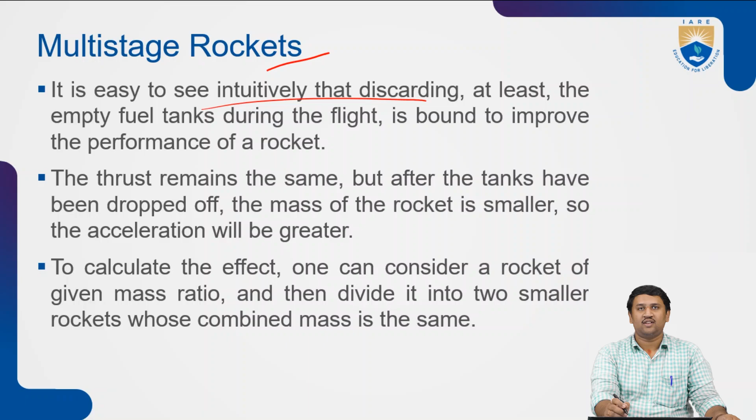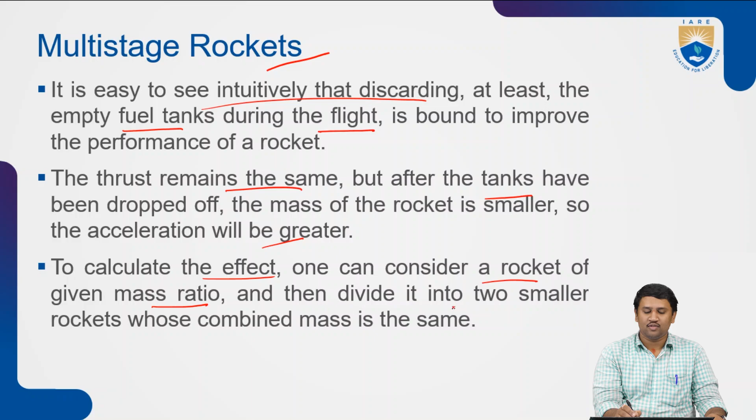It is easy to intuitively see that discarding the empty fuel tanks during flight improves the performance of the rocket. The thrust remains the same, but after the tanks are dropped off, the mass of the rocket is smaller and the acceleration gets greater. In order to calculate the effect, one can consider a single rocket of given mass ratio, then divide it into two smaller rockets whose combined mass is the same. This we have already discussed in the previous class.

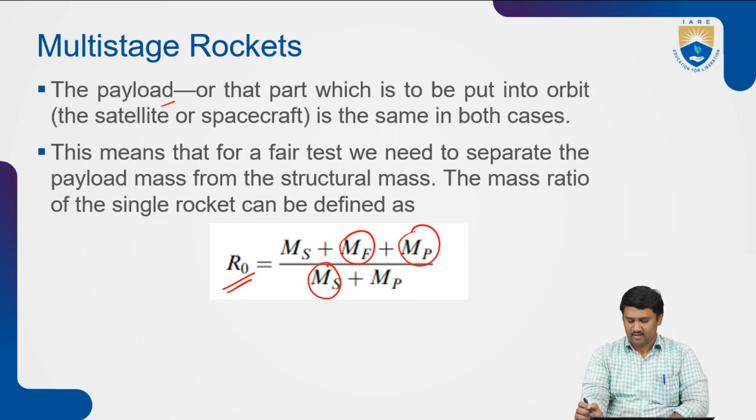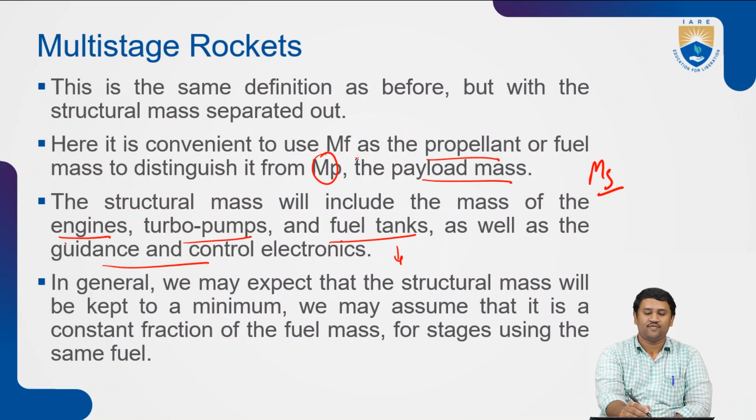In order to keep this empty structural mass to a minimum, we may assume that a constant fraction of your fuel has to be maintained by your structural mass. Now let us understand the same.

If you are considering a single stage rocket, it will be in this manner, where you have mass of the payload, mass of fuel, and everything else related to your mass of structures. If you split the same thing into two sections, the mass of fuel gets halved, similarly the structure also gets halved, but your payload remains the same.

Now after a certain duration, what happens? If we consider this as stage 1 and stage 2, and this is your payload, after a certain duration of burning of stage 1, that becomes empty weight. That can be discarded so that your complete structural mass gets halved. So half will be removed, whereas the other half of the structural mass from your initial stage and total weight remains as it is, along with half of your fuel.

This can be completely given, in terms of mass ratio for the first stage of the rocket, as mass of structure, fuel as well as payload, which is my initial mass, over mass of structure, half of the fuel and half of the complete this one. This will be instantaneous, or M naught by M, as defined in your mass ratio.

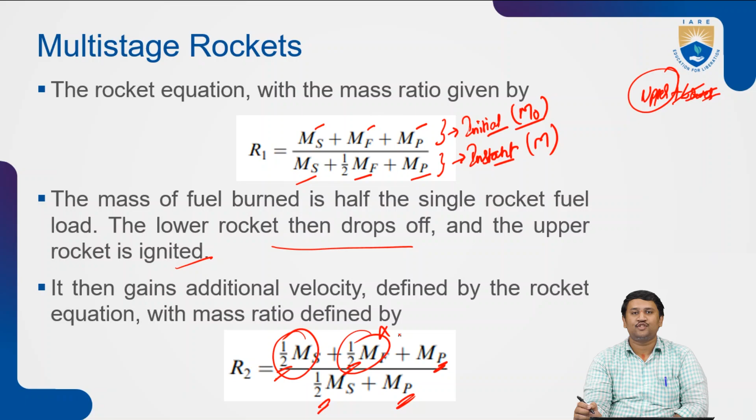Next, MP is nothing but your payload weight, and MS is the remaining final instantaneous structural weight as well as the payload weight, because at the end you will be consuming all of the fuel. Now, if you consider these same ratios and put them into your simple rocket equation, what happens for a rocket having a single stage? You get this equation, where rocket vehicle velocity is nothing but exhaust velocity times the logarithm of your initial rocket mass ratio.

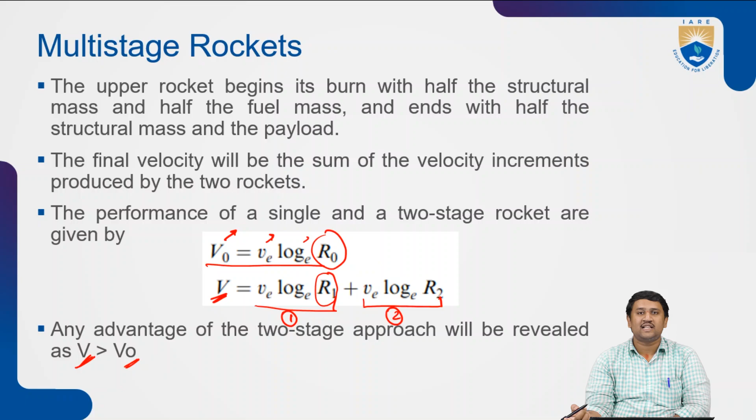Whereas if you're going for multiple stages, particularly a two-stage rocket engine, what happens? The rocket velocity will be equal to a logarithmic value of the first mass ratio for stage 1, plus another addition for stage 2. On comparing, we can get a clear idea that the final rocket velocity for multi-stage rockets is more than for a single stage rocket, and based on this we will be optimizing it further.

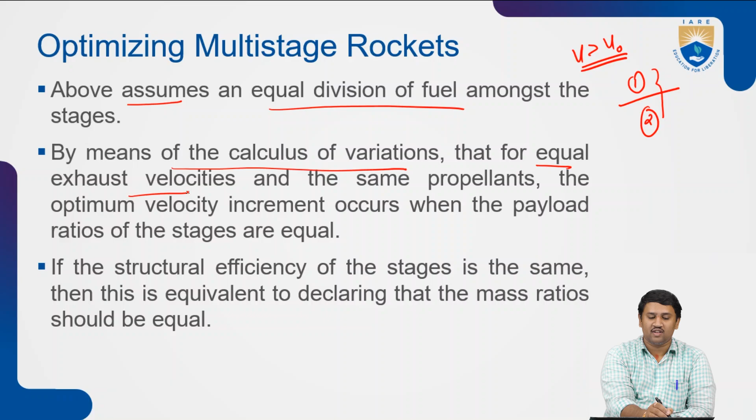Previously, based on v being greater than v naught, we assumed equal division of fuel among the stages. Let's say for stage 1 and stage 2 we have equal divisions, but by calculus of variations, for equal exhaust velocities and the same propellants, the optimum velocity increment occurs when payload ratios are equal across stages. And if the structural efficiency of the stages is the same, this is equivalent to declaring that the mass ratios should be equal. We will understand this clearly before going further.

By means, what we were assuming earlier was for stage 1, stage 2, as well as payload - it's the same example we considered earlier. The mass ratios, particularly the mass of fuel in stage 1, equals the mass of fuel at stage 2. If payload doesn't have any fuel, we are not considering that.

By means of some variations, particularly using calculus, calculating for equal exhaust velocities VE1 and VE2 with the same propellant, the optimum velocity increment occurs when the payload ratios for the stages, denoted by L, are equal. Similarly, if the structural efficiency denoted by sigma of the stages are the same - these are the two new terms we will discuss further - the payload ratio as well as the structural coefficient being same for each stage is equivalent to declaring that the mass ratios are the same.

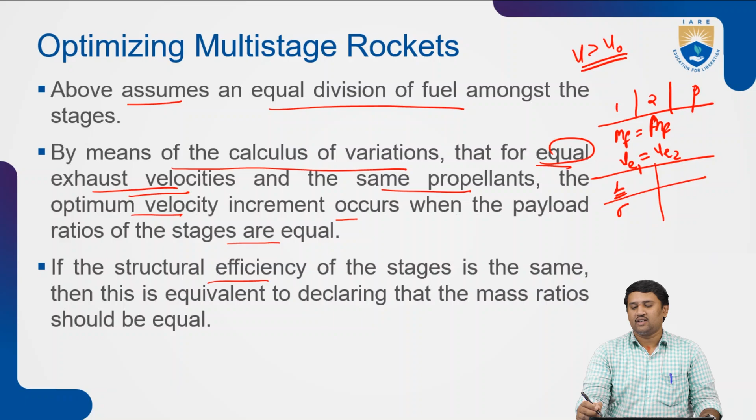Now let us understand the payload ratio. It means the measure of usefulness of the rocket, and the structural efficiency is a measure of degree of optimization of engineering design, denoted by L and sigma for each stage. For optimum performance, the mass ratio will also be the same for each stage.

Now, for example, in a multi-stage rocket, what happens? We'll just go back. Let us see the two-stage rocket engine in a combined form. In a multi-stage rocket engine, if we consider simply what you are doing for a single stage, you are dividing it into two - stage 1 and stage 2.

This is the final payload that we are supposed to inject into the orbit. Considering this as the complete payload, what happens? For stage 1, it's the complete payload that is supposed to be injected to a certain altitude by whatever fuel it has, as well as the structural mass - it's supposed to consider the structural mass as well as the mass of the fuel.

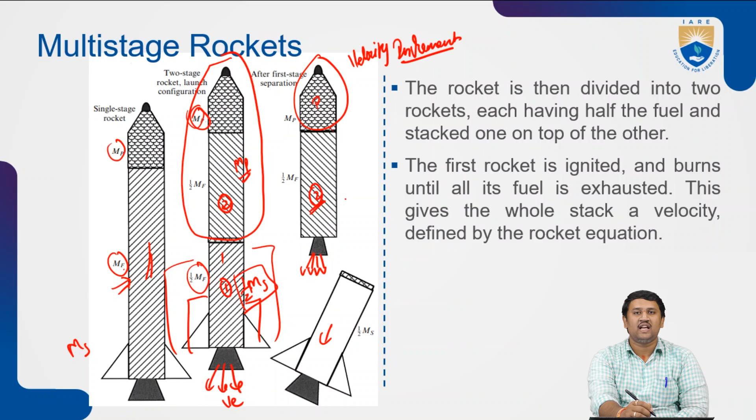In order to drop this particular payload into a certain orbit or altitude, the energy required will be less compared to stage 1. Because at stage 1, the complete stage 2 as well as the stage payload is a complete payload for stage 1, whereas for stage 2, only the final payload is the actual payload to be inserted into orbit. For this purpose, stage 2 does not need that high amount of thrust and high specific impulse. Let us come back.

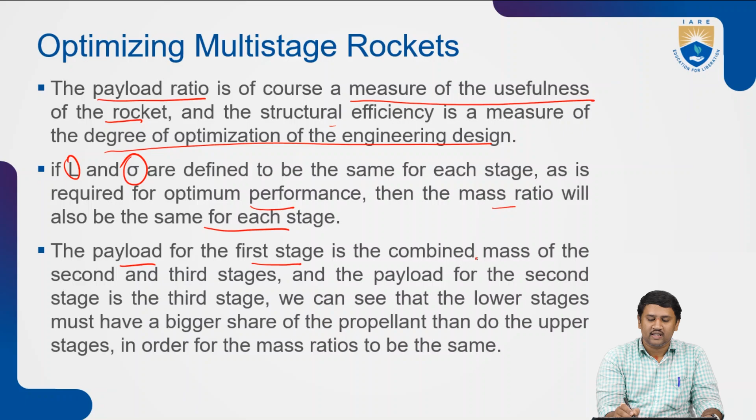Now, as discussed, the payload for the first stage is a combined mass of the second and third stages. In our case, the third stage is my payload, particularly a satellite or a launch vehicle, anything else. And the payload for the second stage is only the third stage, which is nothing but our payload.

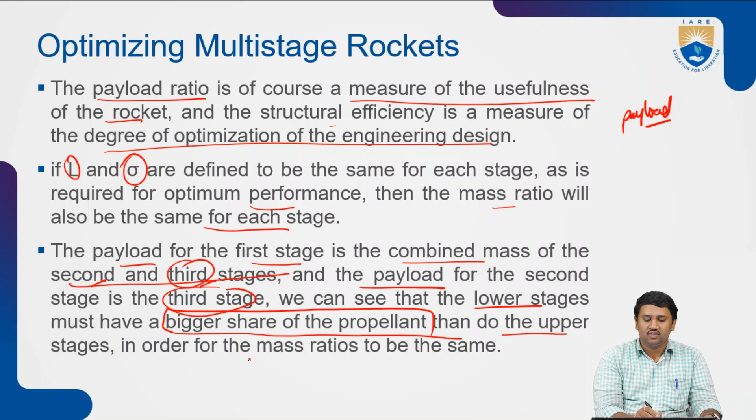Now, the lower stages should have a bigger share of propellant. Why? Because we need to create more exhaust velocity, particularly more velocity, in order to push the second and third stage further. So my lower stages should have more propellant to create more velocity than the upper stages, and in order to keep the mass ratios and exhaust velocities consistent. Now, if we denote this mathematically...

The payload ratio for a single stage is denoted by L, which is the mass of payload to the ratio of mass of structure and mass of fuel, and this is for a single stage. Similarly, for structural efficiency: mass of structure, mass of fuel, and mass of structure again.

Let us understand. In this case, everywhere, mass of payload is nothing but final to initial, particularly in order to inject the payload to a final orbit, what are the initial structural as well as fuel requirements that we require. Based on that, we are providing the payload ratio. Similarly, for structural efficiency, what will be the final structure that is available after the complete exhaustion of fuel, compared to the initial. The structural efficiency is also called as coefficient.

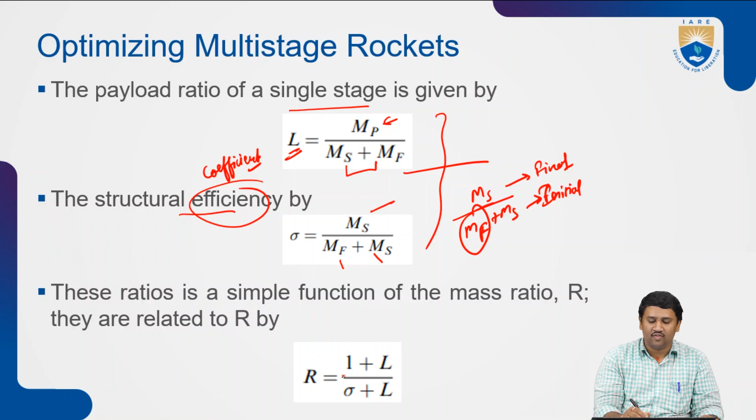Now, if we are considering these ratios as a simple function of mass ratio, then R can be rewritten as 1 plus L, divided by sigma plus L.

Now it's convenient to represent the mass fractions for all three stages as A, B, and C respectively. So the mass ratio for the first two stages R is defined by A plus B plus C, over B plus C, and B plus C over C equals to R.

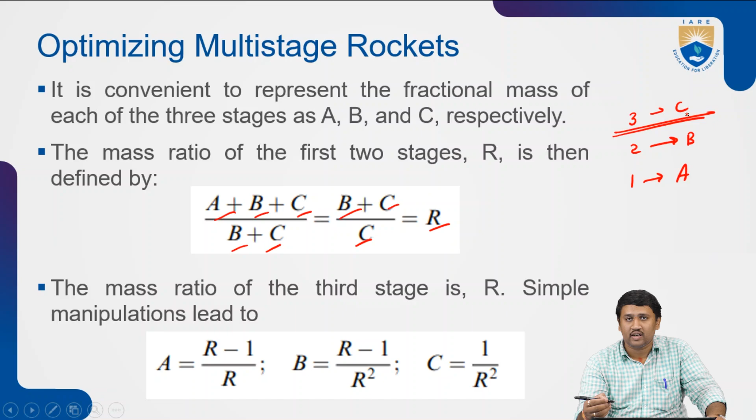Let us understand this: my stage 1, 2, 3 — or let's consider it vice versa, it will be better. My stage 1 is A, stage 2 is B, stage 3 is C. Now this third stage, as we considered previously, is my payload, or you can consider another third stage, it's not an issue.

Now, for the first stage, as discussed earlier, stage 2 and stage 3 are a combined payload. For that reason, we are considering fractional masses, the initial mass, given as m-naught by m. Initially, for stage 1, the total mass of the rocket is basically A plus B plus C, to the ratio of the final mass of the rocket upon completing the first stage, which is B plus C in the denominator.

In a similar form, if we consider the second stage, what happens? This will be the only payload. And while considering the initial mass of the rocket, it will be B plus C as the numerator, to the ratio of the final mass available at the end, which is C. Now we consider these as proportional, equal to my stage ratio R.

Now the mass ratios for the third stage: in order to determine the mass ratios for the third stage, we can rewrite the same in terms of proportions A, B as well as C, and find the basic proportions in which A, B and C are to be maintained in order to create a 3-stage rocket engine.

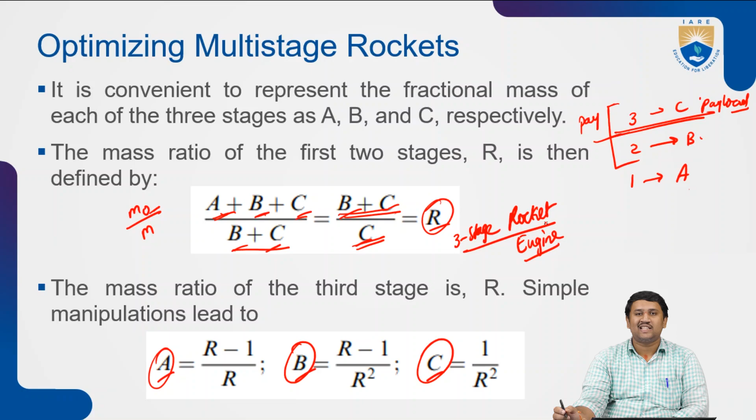Now, for a fair test, the optimization of the value should be determined from parameters of the original single stage rocket. If you consider a single stage rocket, we are making a small comparison to understand how we will be able to identify the parameters. Now, the assumed parameter of a single stage rocket for the same limit is 4.67, which is nothing but my mass ratio R for a single rocket.

Whenever we are considering a 3-stage rocket, considering the first stage towards the ground, second as well as third, the major proportion is to be borne by the first stage. Let's call these stages A, B, C. It's approximately 78.4% for the first stage, similarly B will be 16.9% and C 4.6%. These are the mass ratios identified by considering a few parameters.

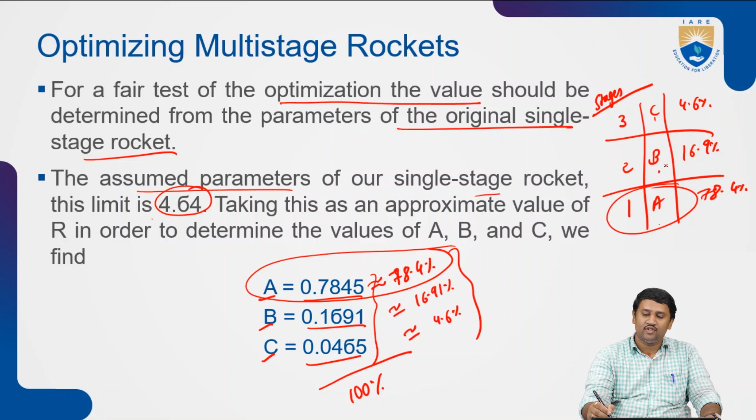This holds because whenever we are launching a 3-stage rocket, we are considering B and C as a payload for stage 1, and for stage B, only C will be having a smaller payload weight. If you are solving more accurately, this leads to a value of 3.39 as the mass ratio for the stages, maintained for each and every stage.

Each stage now has the same mass ratio, so the velocity increment is also gained by the same amount. The total velocity gained by each and every stage is 3 times 2700, which is the exhaust velocity, considering it the same exhaust velocity, multiplied by the natural logarithm of 3.39 as the mass ratio.

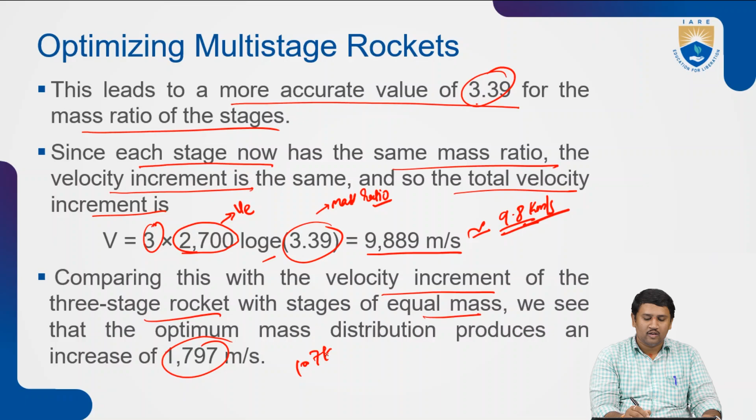This gives around 9.8 kilometer per second. The total velocity of the three-stage rocket engine would be 9.8 kilometer per second. Comparing the velocity increment for three-stage rocket engines with stages of equal mass, we see that optimum mass distribution produces an increase of 1.7 kilometer per second in addition.

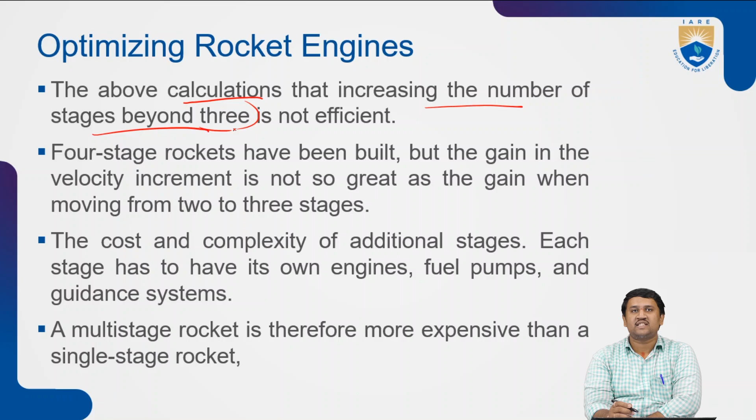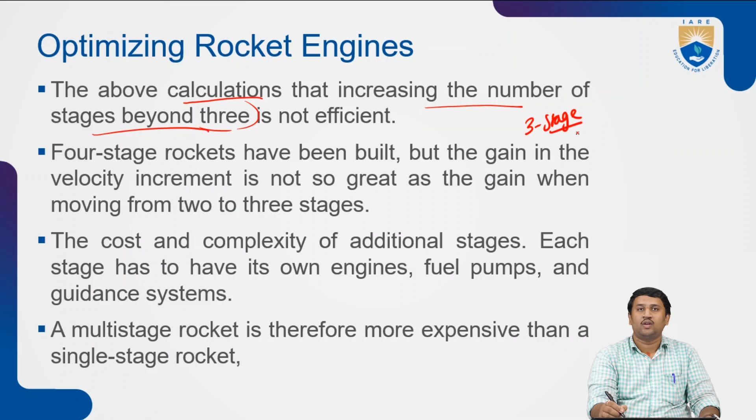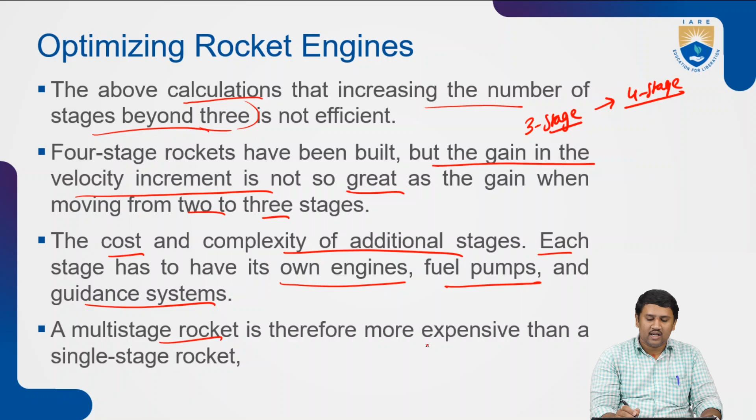Now, as we have optimized the multi-stage rockets, we are supposed to optimize the rocket engines also. The calculations we performed earlier increased the number of stages till 3. What if we increase the stages to a 4-stage rocket? The issue is the gain in velocity increment is not as much compared to going from 2 to 3 stages, and the cost and complexity of each additional stage increases, where each stage will have its own engines, own fuel pumps and own guidance systems to operate. A multi-stage rocket is therefore more expensive than a single stage rocket, obviously.

Now, whenever we are optimizing the rocket engines, let us understand in what way a rocket travels. A rocket which is currently under lower atmosphere operates in conditions very different to those in the vacuum of space. If you consider the same type of rocket engine, those efficient under Earth conditions are completely different in space. So these are supposed to work under two separate regimes in which the conditions vary drastically.

At the initial stages of flight, the atmospheric pressure is high near the Earth, and it affects the performance of the rocket, whereas atmospheric drag and other aerodynamic effects are also strong in the low atmosphere. In space, the engines operate in vacuum and there is no drag or lift. The rocket exhaust is strongly affected by the pressure at the exit of the nozzle, and the air pressure retards the exhaust stream. For example, let us consider a rocket nozzle.

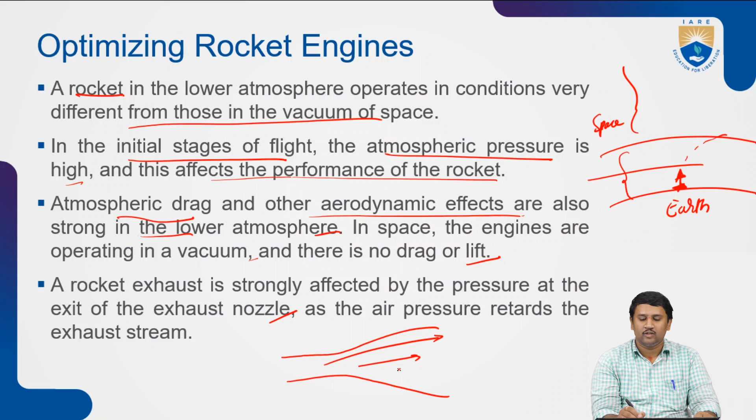This will be my nozzle. Whenever the exhaust is sent through, particularly exhaust velocity, gases in terms of combustion products are sent toward the nozzle. What happens at the lower atmosphere versus space? We have air, particularly air at atmospheric pressure, which varies according to altitude, which directly affects the performance of the rocket engine. Under rocket principle, whatever exhaust gases are getting out, the same amount of momentum or opposite force we are getting from the rocket engine. In space, there are no atmospheric effects to be considered.

As soon as the rocket gas expands, the surrounding air will try to push in. If the pressure of the exhaust is less than the pressure of the atmosphere, the air tends to push the exhaust gases towards the center of the nozzle, whereas if the pressure of exhaust is higher than the pressure of atmosphere, what happens?

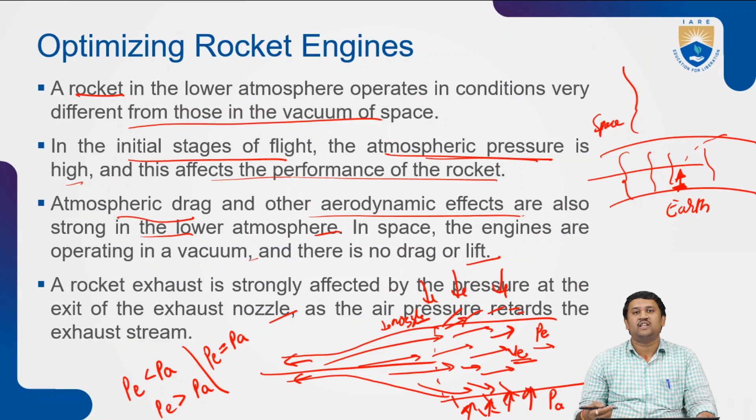The exhaust will try to develop itself along a certain area through which it can dissipate its energy. In some cases, the pressure of the exhaust equals the pressure of the atmosphere. In those cases, it follows a certain boundary in which the energy is dissipated. These particular conditions are called nozzle expansion, which we'll discuss further in module 2.

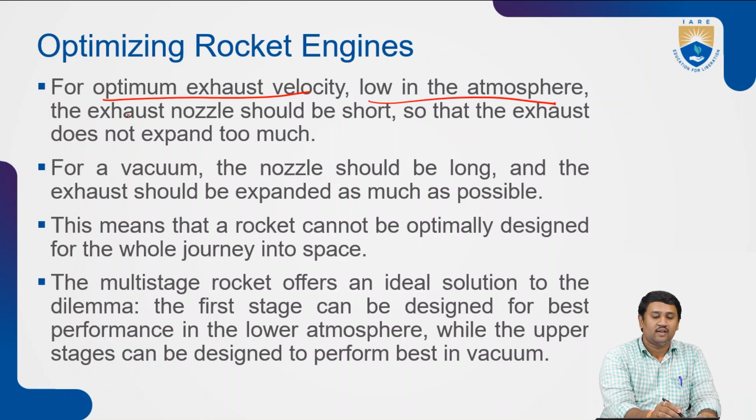In order to find the optimum exhaust velocity in the atmosphere, the exhaust nozzle should be short and the exhaust should not expand too much. For vacuum, the nozzle should be long and the exhaust should be expanded as much as possible.

This means a rocket cannot be optimally designed for the whole journey through space, whereas a multi-stage rocket offers an ideal solution to this dilemma. The first stage can be designed for best performance in the lower atmosphere, whereas the upper stages can be designed to perform best in vacuum.

This applies to the nozzle length and it can also apply to the type of fuel used. Do you understand this?

Let's consider the same example: a 3-stage rocket engine where the third stage is my payload. Let's say the first stage will be working, and if it's a single rocket engine, I'm supposed to have a single long rocket which burns continuously to deliver my payload to a certain altitude.

Now, in my case, if I'm considering a multi-stage rocket engine, I can split it into two, right? I redesign my first stage to overcome aerodynamic properties, particularly atmospheric properties. To counter them, I need a higher amount of propellant in the first stage.

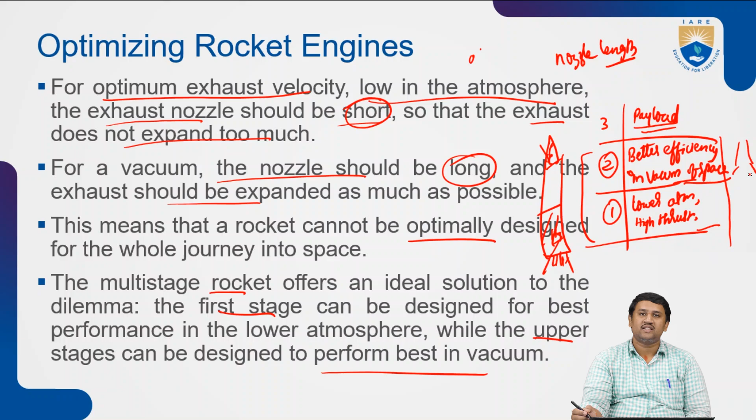The same thing can be applied for the type of fuel we are using. The first stage has the task of lifting the rocket more or less vertically through the lower atmosphere, and it needs high thrust because it has to lift the entire mass of the multi-stage rocket, particularly stage 2 plus 3, or the payload.

Now, the upper stages are lighter because as I progress further, I discard the lower stages so that the overall mass of the rocket decreases and my efficiency increases. That is the whole concept of multi-staging, right?

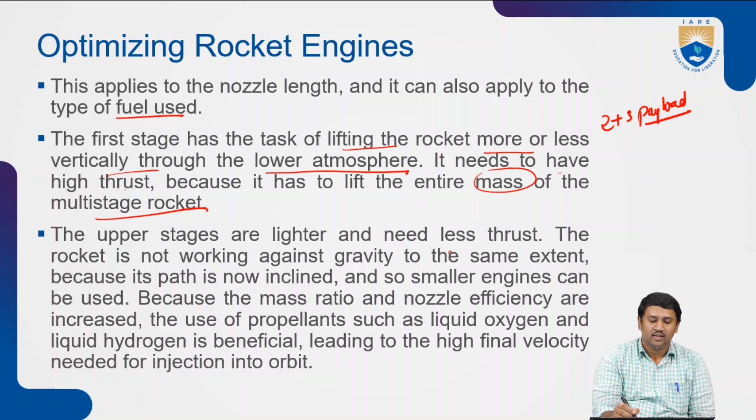Now, the rocket is not working against gravity as much because it is already at a certain altitude with some horizontal as well as vertical velocity. So smaller engines can be used as the path has now been inclined.

Because the mass ratio and the nozzle efficiency are increased, the use of propellant such as liquid oxygen and liquid hydrogen can be beneficial in order to achieve the high final velocity required for injecting a payload into orbit. This technique can be challenging, but a similar concept has been applied in Saturn V.

Saturn V is a multi-stage rocket engine which has three stages, or we can say four stages, where the 4th stage is my payload, particularly my lunar module.

I'm taking an example of my Apollo aircraft, particularly Apollo 11 and the lunar module. My 3rd stage will be for injection, and the 2nd stage and 1st stage will be my intermediate stages.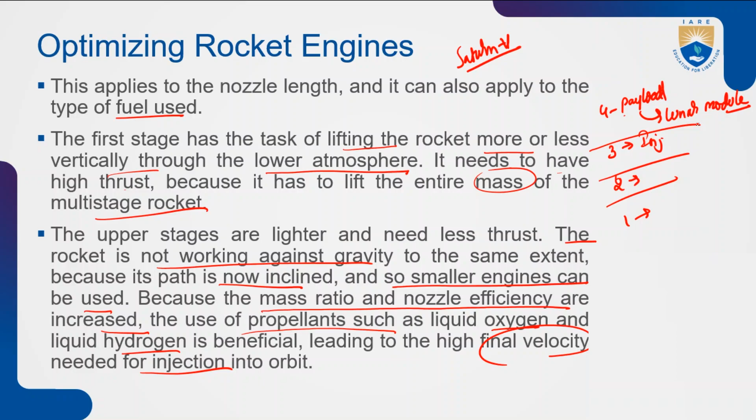In stage 1, we have 5 F-1 rocket engines, which combinedly produce a massive amount of thrust in order to propel the 3 other payloads stacked above one another, where the first two stages have their own fuel plus oxidizer in order to maintain themselves in a stable orbital path.

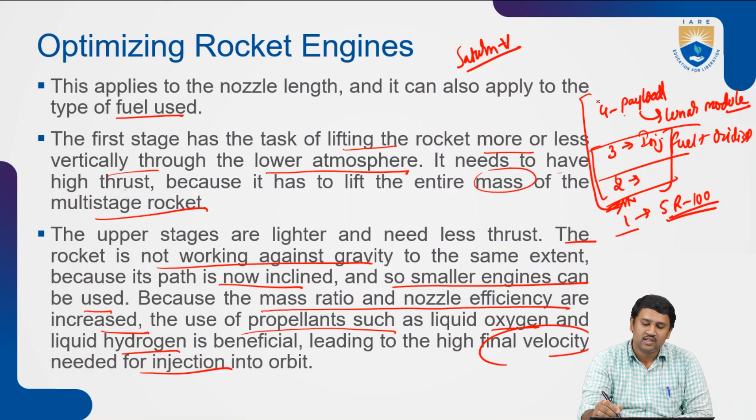Now, as soon as stage 1 is discarded and used up, what happens? From stage 2, as soon as it gets discarded, the complete structural mass goes off and stage 2 gets reignited, which again pushes stage 4 and 3. Now, stage 2 is enough to maintain or reach a low Earth orbit.

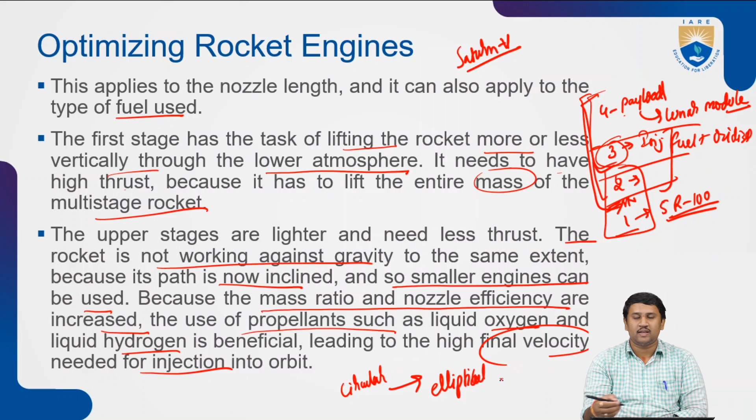Now, in order to transfer from low Earth orbit to a lunar transfer orbit, what will we be using? We will be using stage 3. What this does basically is push or transfer, converting a circular orbit to an elliptical transfer orbit, as we discussed earlier in previous classes - an elliptical transfer orbit.

Between Earth and Moon, Earth being one of the celestial bodies, we are transferring an object from Earth's sphere of influence to the Moon's, which requires certain velocity. That will be achieved by your stage 3. Later on, as soon as it reaches the Moon's orbit or sphere of influence, we will be creating a perigee burn, which means decreasing the velocity of the rocket vehicle in order to reduce speed and capture onto an orbit of the Moon.

Now, as soon as the object is captured, we will be separating from stage 3, and only the 4th part, which is nothing but the 4th payload, the lunar module, is in the lunar sphere of influence. From there on, it's our choice what we want to do. As with Apollo, they had 2 sections for the lunar module: one, the orbiter, which orbits around the Moon, whereas the second one went onto the surface of the Moon and landed the first ever man in space, particularly on the surface of the Moon.

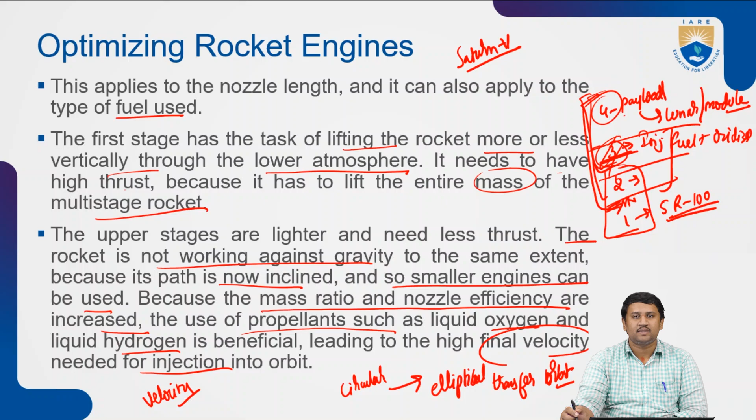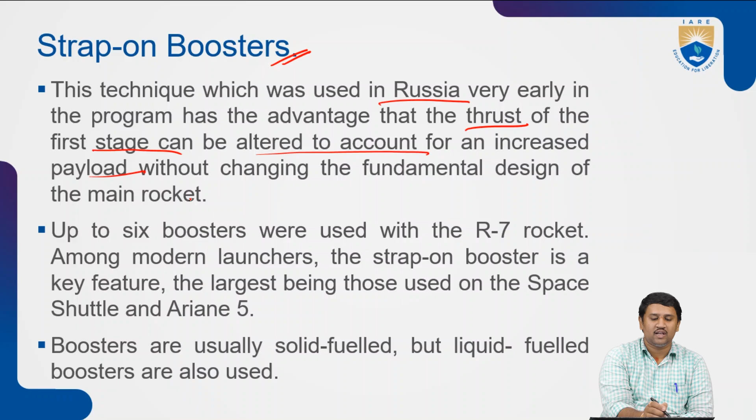Next, we'll be learning a small concept regarding strap-on boosters. This is a technique that was used in Russia very early in the program, which has an advantage: the thrust of the first stage can be altered to account for increased payload without changing the fundamental design of the main rocket. Up to 6 boosters are used under the R7 rocket, and among modern launchers, strap-on boosters are a key feature. The largest strap-on boosters used in space are on the Space Shuttle program as well as Ariane 5. The boosters are usually solid fuel, but liquid fuel boosters can also be created and used.

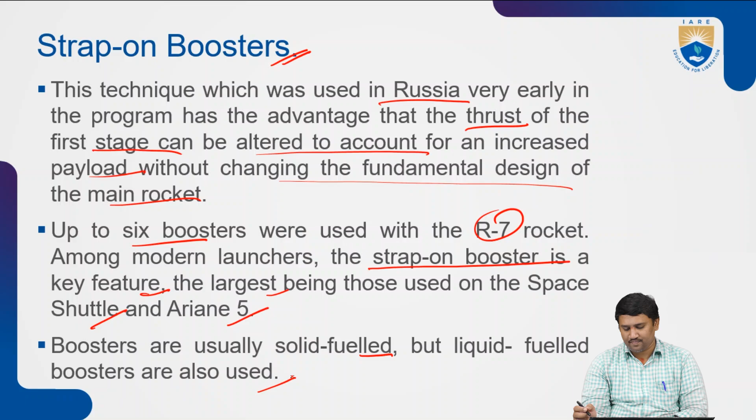Now, let us understand the concept. This approach is a variant of multi-stage design, the calculation of velocity increment is carried out the same way as for the multi-stage rocket. The boosters can be used to improve the performance of a 3-stage rocket, effectively making it a 4-stage vehicle, or they can be used with a 2-stage rocket engine.

Or a 2-stage rocket with boosters. Now, in this case, a 2-stage rocket with strap-on boosters, what happens is the individual boosters are mounted through either explosive bolts or through hinges and actuators to hold them clearly onto the first stage.

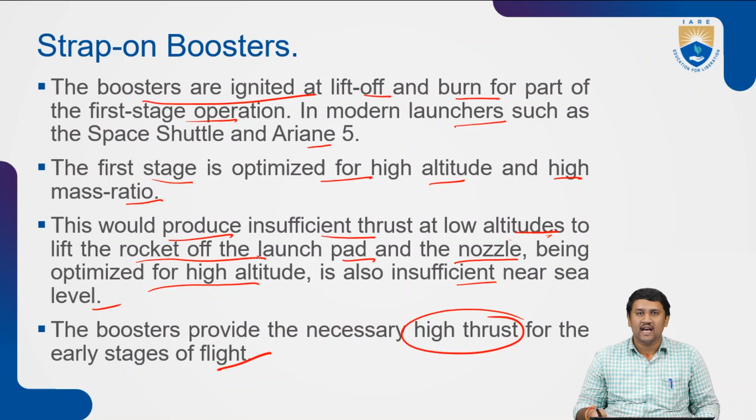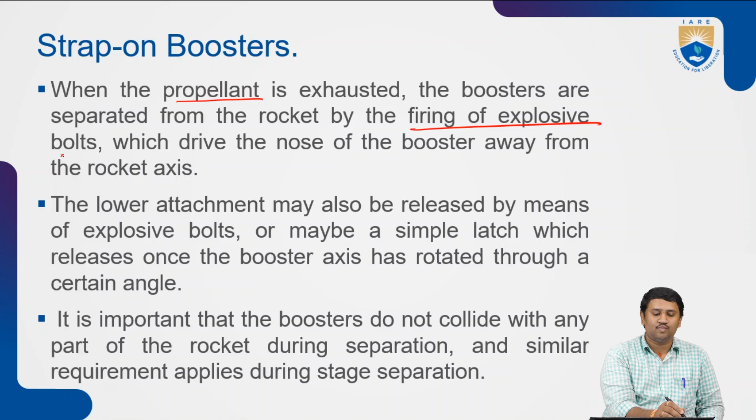So the boosters provide the necessary high thrust for the early stages of flight, particularly during launch from the launch pad, as well as to attain certain height. Now, when the propellant is exhausted from a strap-on booster, the boosters are separated by firing explosive bolts, also called pyrotechnic igniters, which drive the nose of the booster away from the rocket axis.

Particularly, these explosive bolts will throw off the strap-on boosters away from the rocket so that it moves forward as the exhaust for the rocket boosters gets exhausted, although the main engine keeps running. So the rocket moves forward, whereas the explosive bolts push the strap-on boosters aside.

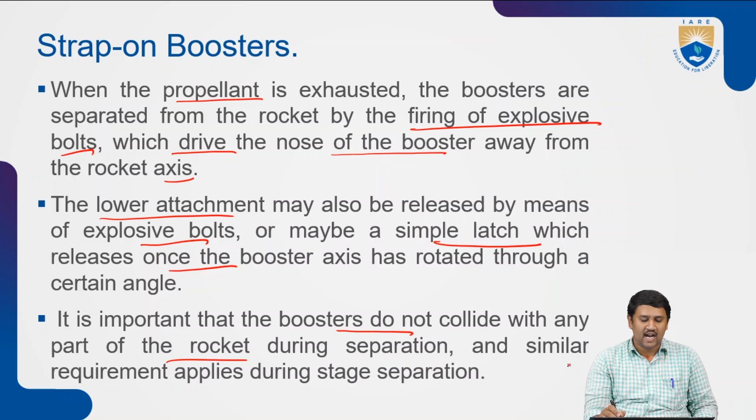The lower attachment can also be released by means of explosive bolts, or maybe a simple latch which releases once the booster axis has rotated to a certain angle. It is important that the boosters do not collide with any part of the rocket during separation, and a similar requirement applies during stage separation.

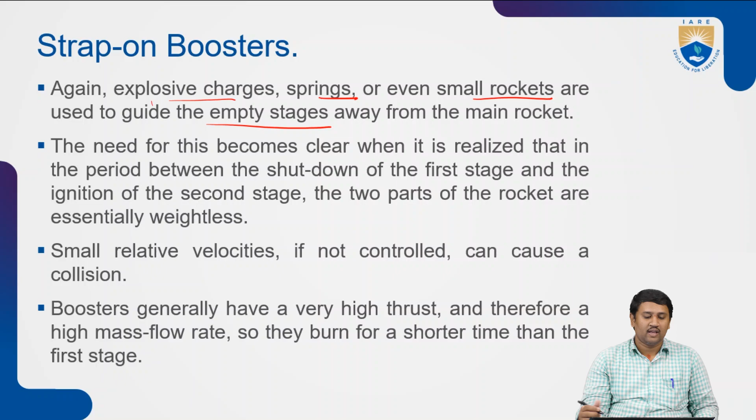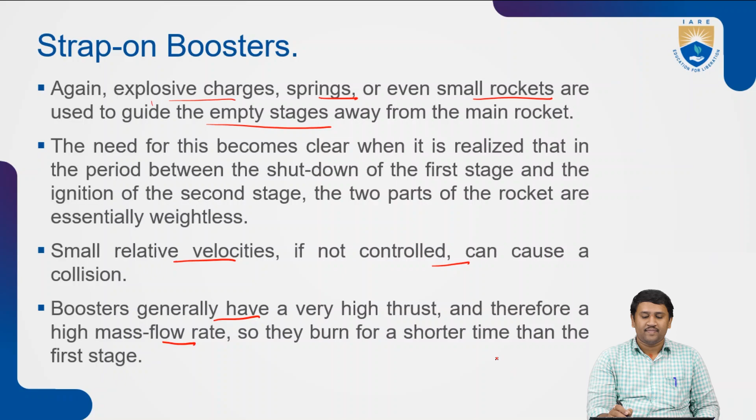Explosive charges, particularly springs and even small rockets, are used to guide an empty stage away from the main rocket. This becomes clear when we realize that in the period between the shutdown of the first stage and the ignition of the second stage, the two parts of the rocket are essentially weightless. Small relative velocities, if not controlled, can cause collision of the rocket. The boosters generally have a high thrust, therefore a high mass flow rate, so they burn for a shorter time rather than the first stage.

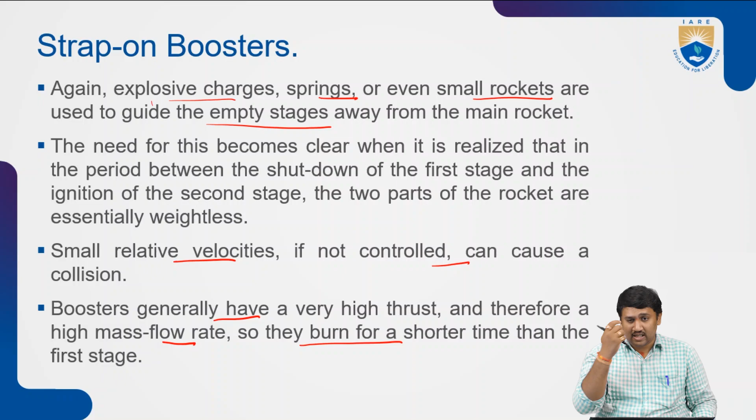Let us understand this strap-on boosters concept clearly. I will explain a bit. We'll consider the same example, in what way these are staged accordingly, so that we can get a clear idea at what time they work.

As when you're launching from a launch pad, what happens? All the three engines simultaneously after a certain period of time are ignited. Let's say we are considering solid rocket boosters, which upon ignition can't be turned off. First, the central rocket, particularly the stage 1 engine, is ignited so that we can check out its complete functionality. Once we are confirmed, then only we ignite the solid rocket motors. As these three are working in unison, they provide a high thrust, which propels my rocket away or above the launch pad.

Now, as the altitude increases, after a certain altitude, we are tilting a bit, right? A small pitch correction is made.

Now later on, as the mass flow rate for boosters is comparatively higher than my first stage engines, which use a liquid fuel plus oxidizer, what happens? My first stage can be controlled in every possible way, whereas my strap-on boosters can't be controlled. As soon as they are ignited, they work continuously till they exhaust their complete fuel.

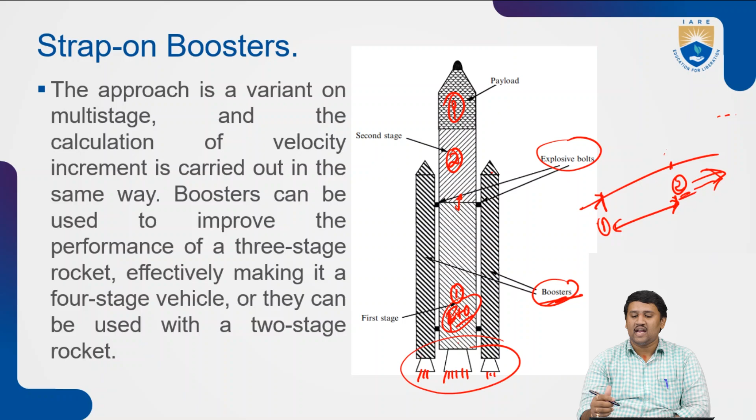So after stage separation and during the weightlessness, after a certain period of time, as stage 2 reignites, it tends to push the rocket towards its final orbit. Why? Because the initial mass from the boosters as well as the first stage gets cut off, so the overall mass ratio for my second stage and payload remains very small. So by changing my type of engine as well as my type of fuel, I can optimize to have a higher injection velocity starting from that particular altitude.

Now we'll understand how to maintain the mass ratio as well as the exhaust velocity. This happens under two parts. The first is the calculation carried out for the total mass change for the two boosters together, the part of the first stage propellant exhausted up to the point of booster burnout. Burnout is the point at which the booster gets completely exhausted, meaning there is no solid or liquid fuel left in the booster.

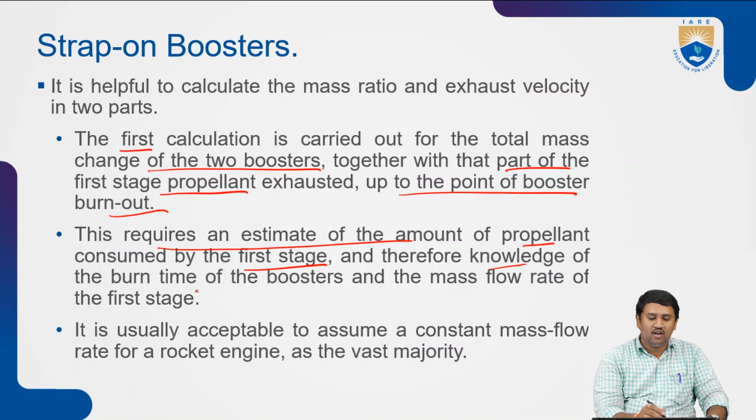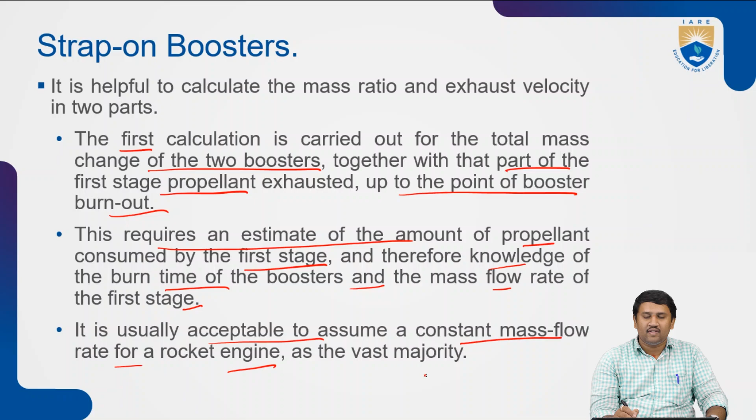This requires an estimated amount of propellant consumed by the first stage, therefore the knowledge of the burn time of the boosters and the mass flow rate of the first stage, which we already know. It is usually accepted to assume a constant mass flow rate for the rocket engine for the vast majority. The second part of the first stage burn is treated in the same way, with the final mass of the first stage in the denominator of the mass ratio and the mass of the first stage at booster burnout in the numerator.

The second and third stage mass ratios are calculated in the generalized usual way.

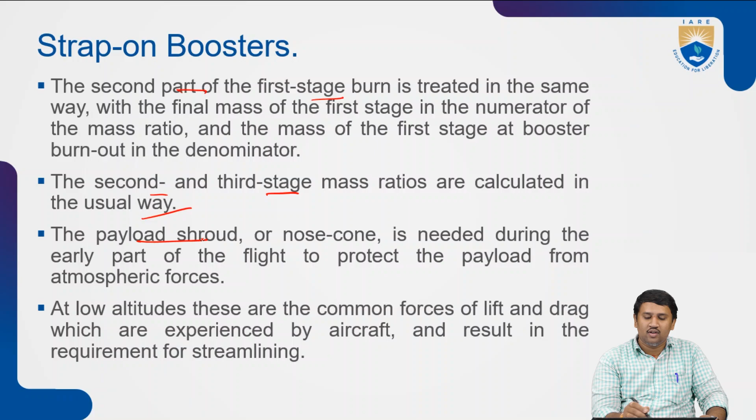Now another concept, particularly a payload shroud or nose cone, is needed during the early part of the flight to protect the payload from atmospheric forces. The payload shroud is a cover, also called a nose cone, needed to protect the payload from atmospheric forces during launch and while the atmosphere remains. As soon as the rocket is out of the atmosphere, we can discard the nose cone to save structural mass.

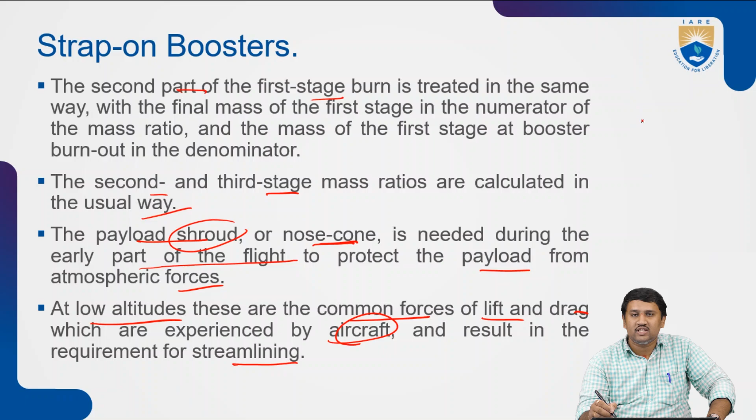Now at low altitude, there are common forces, particularly lift as well as drag, experienced by the aircraft, and as a result streamlining is required. Whenever we are launching a rocket, we can't launch with a blunt face because there will be a sufficient amount of backward force, particularly drag, onto the rocket.

In order to reduce this, we streamline it, also called the nose cone. As soon as the air goes through, it deflects itself. As the rocket goes, it deflects the air, until there is no air left, at which point you can directly discard this nose cone in order to reduce the overall structural mass.

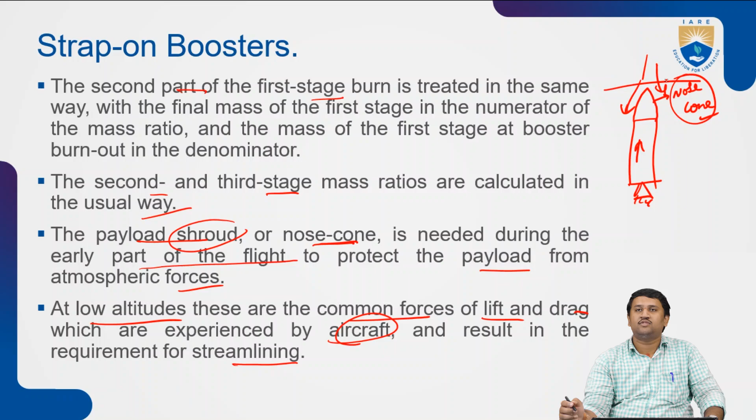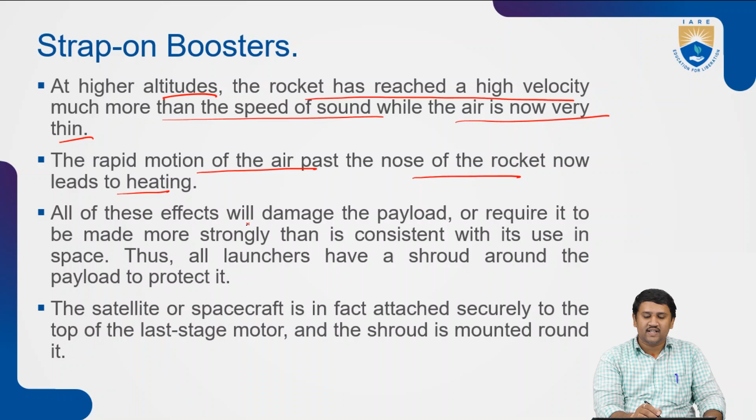Now at higher altitudes, the rocket has reached a high velocity, much more than the speed of sound, while the air is now very thin. So the rapid motion of air past the nose now leads to heating. All these effects will damage the payload or require it to be made stronger than is consistent with its use.

So all launchers have a shroud around the payload to protect it, and the payload can be a satellite or a spacecraft. It's attached securely to the top of the last stage motor, particularly the second or third stage in our case, and the shroud is mounted around it. If I'm considering this as my last stage motor...

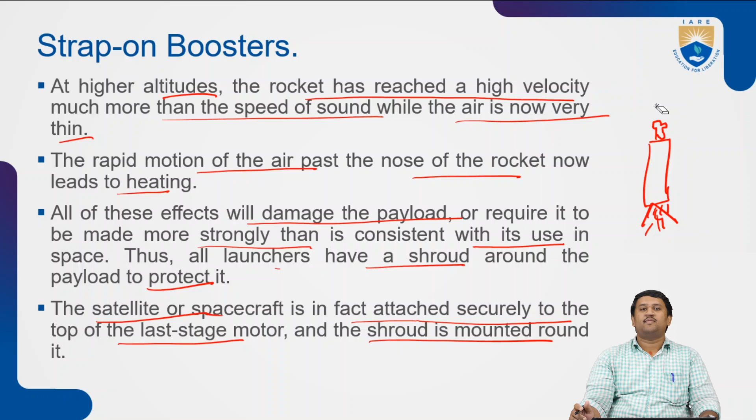...and this is my satellite, that will be my payload shroud. As soon as it gets out of the particular altitude, it gets discarded, then it will be directly flowing into the vacuum of space.

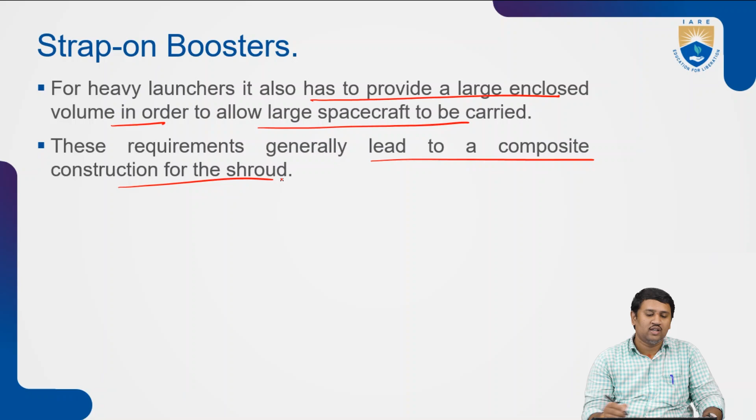Now for heavy launchers, it also has to provide a large enclosed volume in order to allow larger spacecraft to be carried, which generally leads to a requirement of composite construction of the shroud to minimize the weight but maintain structural integrity.

Why? To protect the payload.

Based on all this, for a single stage or multi-stage rocket, the components it's supposed to have are: a rocket motor, plus fuel plus oxidizer in terms of tanks, plus payload enclosed in a shroud, let's say a nose cone. These are your basic stages for a single rocket motor engine.

Now if you are putting multiple stages, these are added up in terms of stages, then the payload remains as it is.